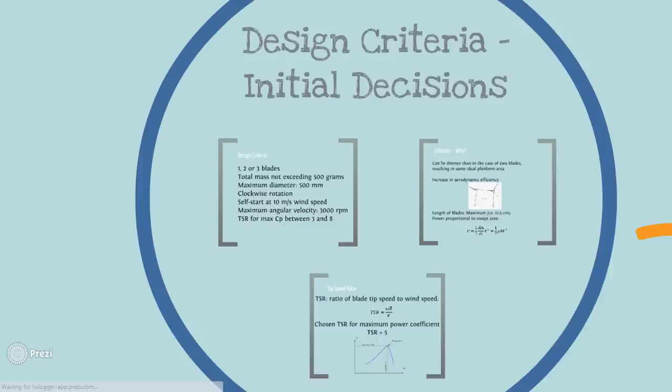The design specifications for this task are as follows: 1 to 3 blades, maximum weight of 500 grams, and a maximum diameter of 500 millimeters. It must self-start at 10 meters per second and must not exceed 3000 revolutions per minute. Finally, it must be designed to have a tip-speed ratio between 3 and 8 at its maximum power output.

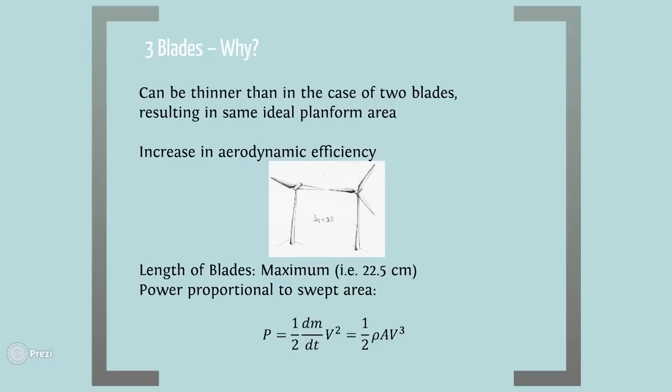Our first design choice was to use a 3-blade turbine to maximize energy extraction from the air. But why do we use 3 blades instead of 2? Wouldn't it save weight and material costs? Well, 3 blades could be designed thinner than 2 blades and hence maintain the ideal planform area while increasing aerodynamic efficiency. PAL also decided to maximize the length of the blades after realizing that the majority of the lift comes from the tip region and that the power was proportional to the swept area.

After settling on 3 blades, the next consideration is to determine the optimum tip-speed ratio. Taking into account the fact that the real TSRs are usually higher than the design ones, we chose a TSR of slightly less than 5, which is a typical value for a maximum CP.

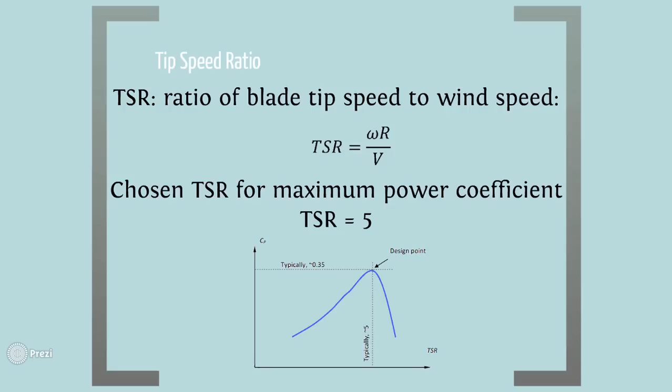Having chosen the key aspects of our design, we can start investigating the aerodynamic characteristics of our turbine. Okay, but start with the basics. How does a turbine actually generate power?

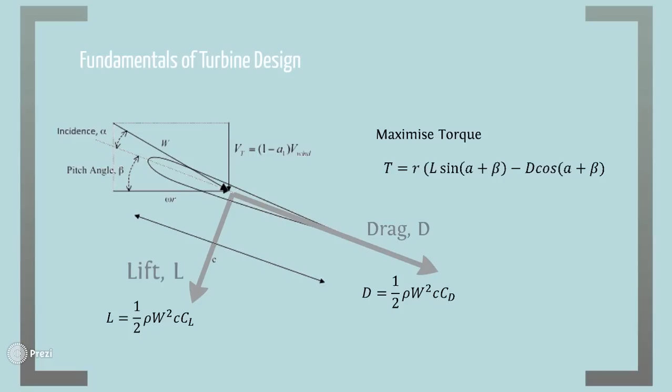Well, there are 2 component forces acting upon the blade at any one time: lift, which generates a moment about the axle, and drag, which opposes motion and reduces the efficiency of the turbine. Ideally, we would maximize the lift-to-drag ratio to optimize the aerodynamic efficiency and the torque produced by the blade. This torque will then drive a power generating device such as a dynamo.

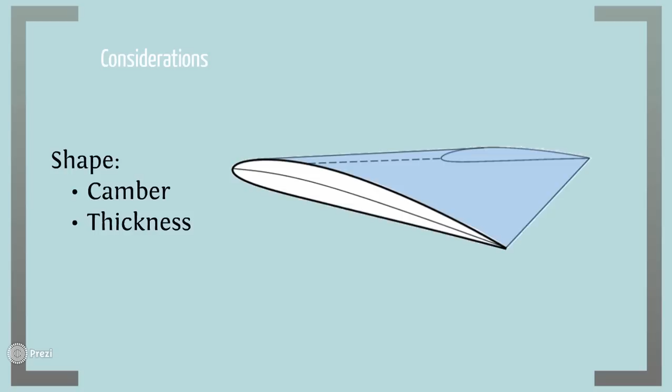There are 3 key design considerations that affect the performance of the individual blades: the shape of the airfoil, such as the camber and thickness, the span-wise pitch variation, and the span-wise chord length variation.

PAL conducted extensive research into different types of airfoils used in wind turbines. According to Dr. Giguère and Dr. Selig, the SG6040 and SG6043 are appropriate for small turbines. Upon further analysis, we found that the SG6040 is exceptionally efficient and sturdy at the root, and the SG6043 is more aerodynamically efficient for the tip.

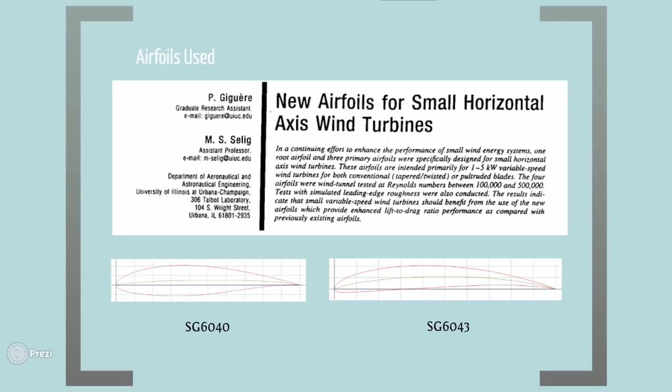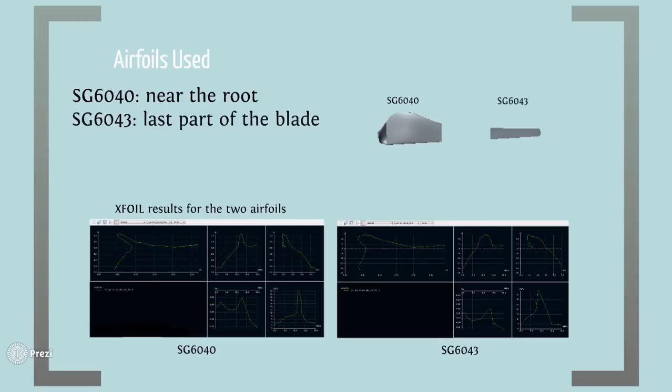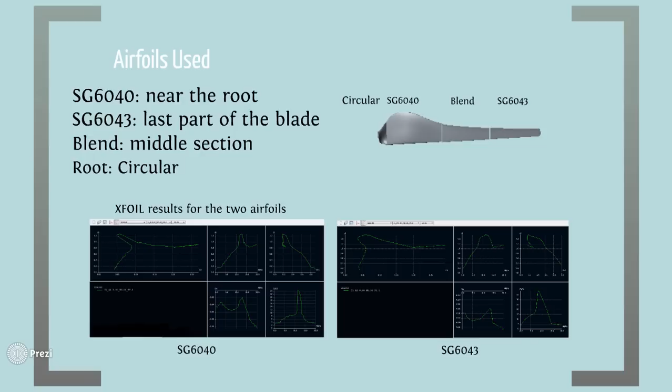We therefore decided that we would experiment with a blend of airfoils along the blade. We used the SG6040 for the portion of the blade closer to the root, and the SG6043 for the portion closer to the tip, with a blended section in between. Because a negligible amount of lift is produced at the root, we decided to use a circular section for structural purposes and to reduce the obstruction to airflow.

Utilizing xfoil and airfoils.com, we checked that the research paper by the University of Illinois at Urbana-Champaign was accurate by testing the aerodynamic performance in the relevant flow regimes. We were also able to find the ideal angle of attack for maximum CL, about 10 degrees, which we then used to calculate the pitch variation of our blades.

There are 2 main equations that can be used to determine this variation: Schmitz and Betz. Both consider the effect of the rotation of the blade on the incident angle of the airflow. However, Schmitz's equation also considers the added effect of the rotation of the wake due to the spinning rotors. Because of its more sophisticated approach, we use Schmitz's equation to define the pitching of the blade along the radius, such that the angle of attack remains at the optimal value with respect to the incident flow velocity.

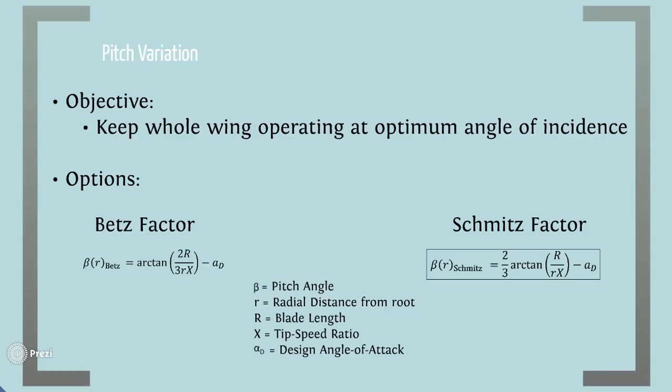Finally, to design an efficient airfoil, we need to optimize the chord length. Our objective in deciding upon the chord length variation of the blade was to maximize the lift-to-drag ratio and maintain a constant circulation along its span. We had 3 different options: the inverse X relationship, the Betz factor, or the Schmitz factor.

Again, only the Schmitz equation considers the rotational flow of the wake, and Dr. Patel, in his book Wind and Solar Power Systems: Design, Analysis and Operation, agreed that Schmitz's was a much more accurate and realistic equation to derive an ideal airfoil. For these reasons, we decided to use the Schmitz equation.

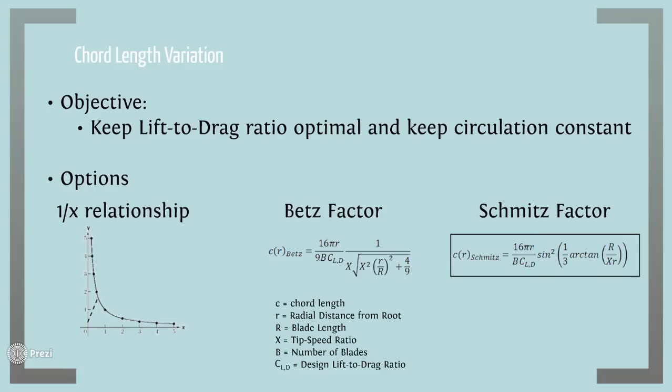Okay, so you've made sure the airfoil is all optimized, but how do you know it won't just break apart? Well, that's the next part of the design process. We have to ensure that what we have come up with so far is within material limits we have to work with. As with most structures, we can break down our internal forces into those acting in plane with the blade and those acting perpendicular to it.

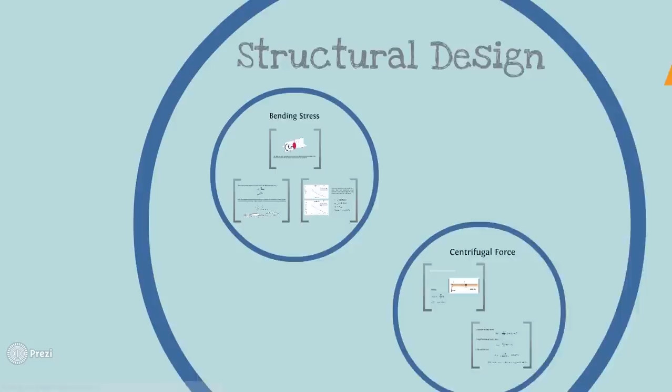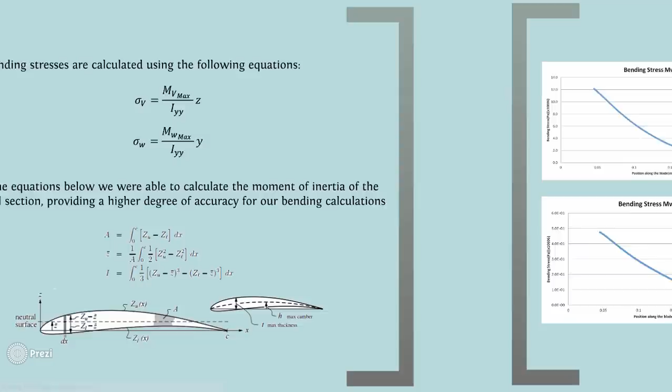First, we looked at the bending stresses that occur due to the force imparted on the blade by the oncoming wind and the inertial forces acting against the rotation. By applying known conditions, such as the free stream air velocity and the predicted angular velocity, we can model the response to such forces using these equations. Luckily, we found that the bending moment experienced by this design is within material limits, with a large safety factor of 44%.

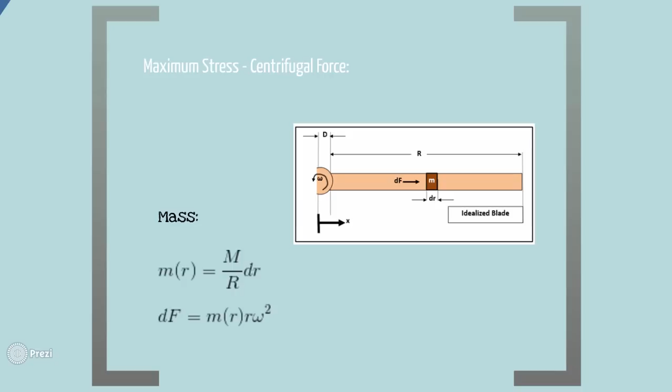The other structural consideration is the centrifugal force that acts on the cross-sectional area of the blade due to the rotational inertia. By integrating the mass of the blade along its span, the tensile forces due to the spinning mass could be calculated.

The rotational inertia is at its maximum at the root, and thus it was important to ensure a suitable cross-sectional area. After including a safety factor, we chose a diameter of 10mm.

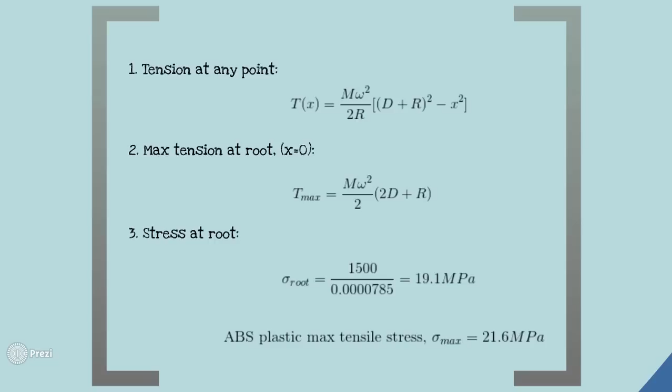Okay Jim, enough about the blade, let me tell you about how we went from concept through prototype. Oh, but I have so many questions. Calm down Jimmy, you can ask them at the end of my pitch.

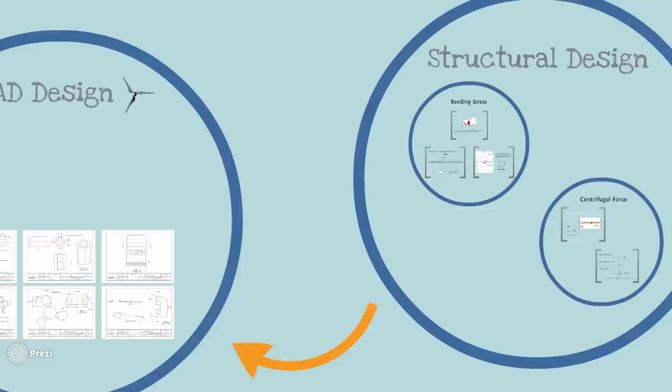Once we had our specifications sorted, we used the computer-aided design program called Creo to realize our design.

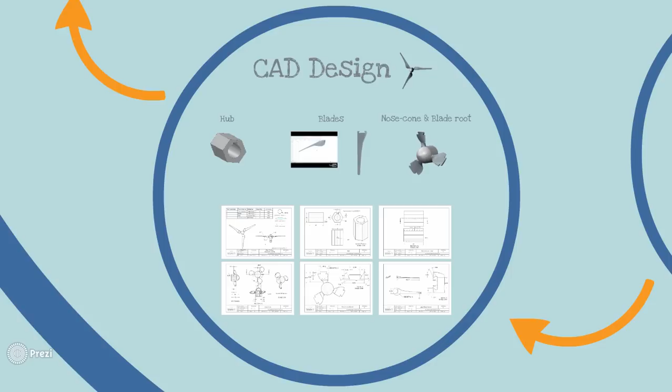Let's have a look at the hub, upon which we will mount the aerodynamic part of the turbine. We designed the hub in a hexagonal shape to improve traction. The blades were created using multiple airfoil sections, which were blended together using the software. Finally, we modeled the nose cone in an ogive shape, much like those seen in typical everyday windmills. This is done in order to minimize the interference effect on the root of the blade and reduce drag.

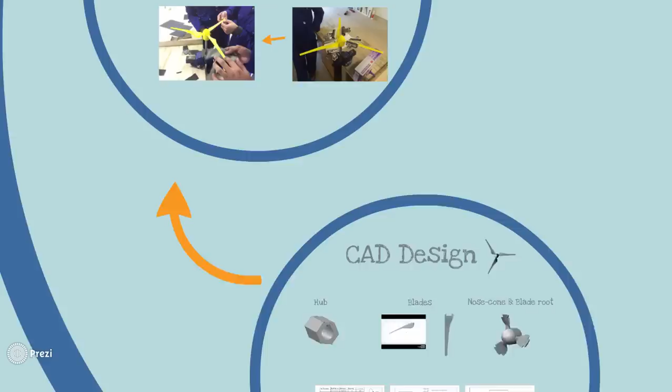The drawings we created in Creo were then used as a reference throughout the manufacturing process. Let's move on to the manufacturing stage. The aluminium hub was milled manually using a variety of precision tools.

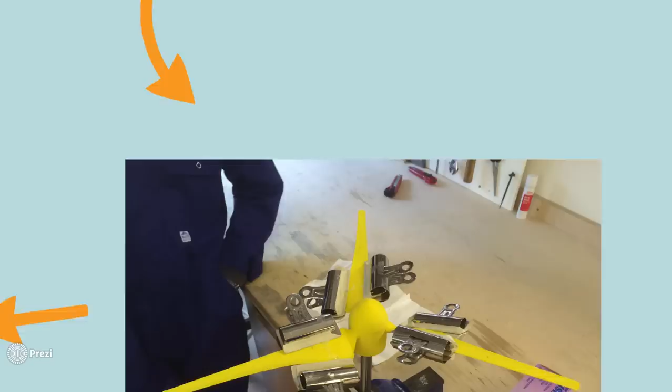We then used the rapid prototyping machine to manufacture our blades and nose cone in multiple parts using our Creo models. The different segments of the blade were glued onto the nose cone and the turbine were sanded. Following this, we applied a layer of lacquer to improve the smoothness and hence aerodynamics of the blade before conducting another round of sanding. Including the hub, the weight of the turbine was found to be about 150 grams.

Wow, it's really starting to take shape. So how did it perform?

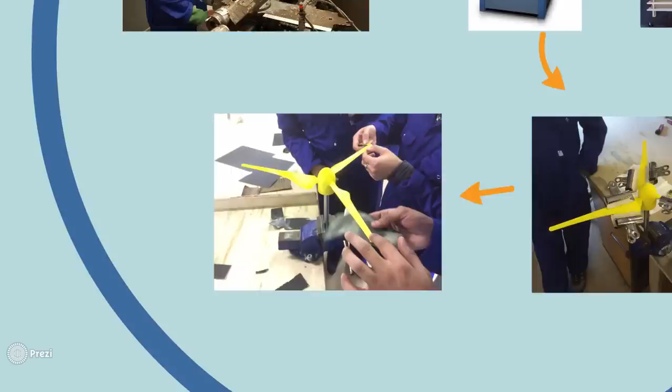Well, taking into consideration that we took a novel approach to designing the blades, we were cautious in our expectations. Unfortunately, the testing of our initial design was not successful, as the wind turbine did not self-start at 10 meters per second or even at higher wind speeds.

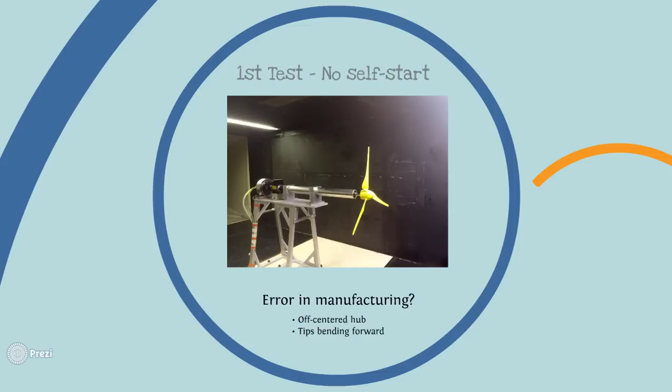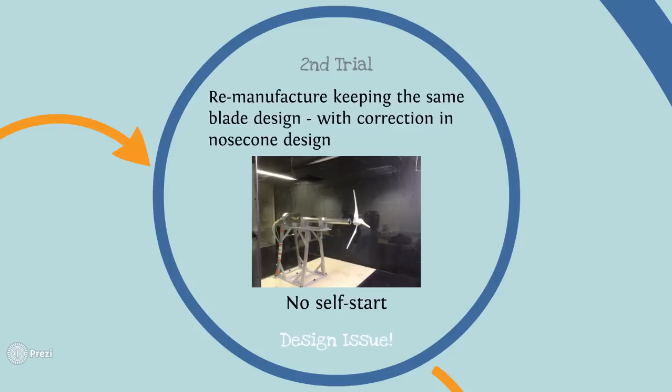So what went wrong? We observed that two of the blades were bending slightly forwards and the pitch of the blades were altered due to the airflow. Furthermore, the hole of the hub was not centered. We decided to reprint the blades to fix these manufacturing defects and rerun the test. However, testing the newly printed wind turbines had the same results as our first test. This clearly indicated that our design was flawed.

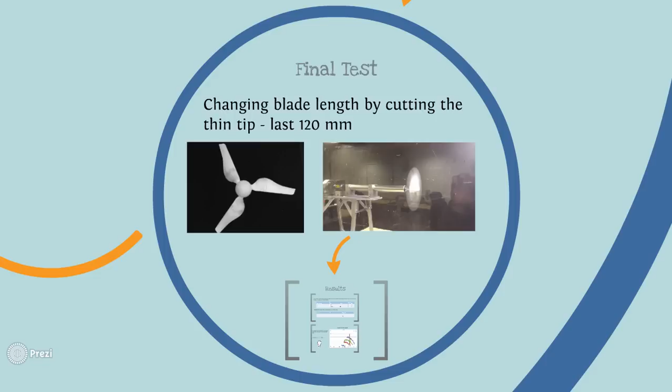We hypothesized that the thin flexible wing tips were the cause for this failure. We decided to cut the blades to almost half the length and hence remove these thin tips. If the turbines were to work effectively now, it would prove our hypothesis. Our test showed that despite it again failing to self-start, it eventually reached a maximum RPM of 2600 after being given a small push. This smaller wind turbine seemed to have a considerably better performance than our first turbine, allowing us to understand the limitations of our design.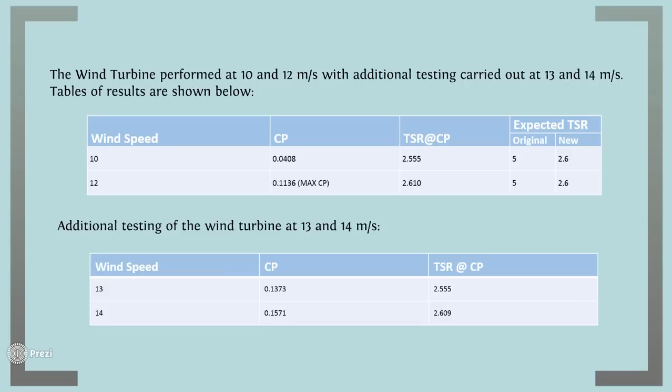The wind turbine was operated at 10 and 12 meters per second. With the changes made to the wind turbine by clipping the blade tips, our expected TSR dropped to 2.6. Our modified wind turbines had a TSR that deviated by less than 2% from the expected values at all wind speeds. The strong correlation between expected and experimental TSRs suggests that the wind profile was accurate and that the performance results could be predicted using our design parameters.

The turbine produced a maximum output of 0.114 at a wind speed of 12 meters per second. The power generated by this wind turbine is enough to light up a bulb.

Wow, that's moderately impressive. But what were the flaws? What can you guys do to come up with a better turbine and save the world?

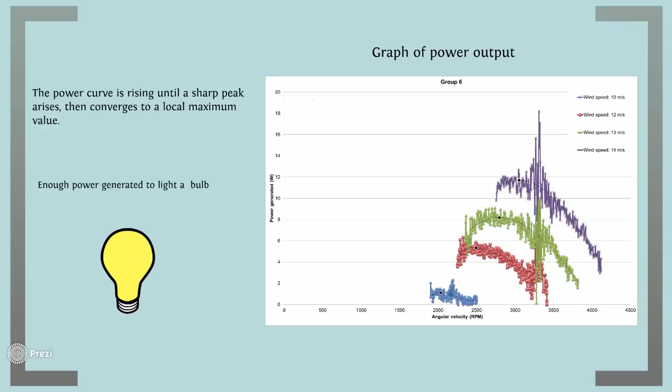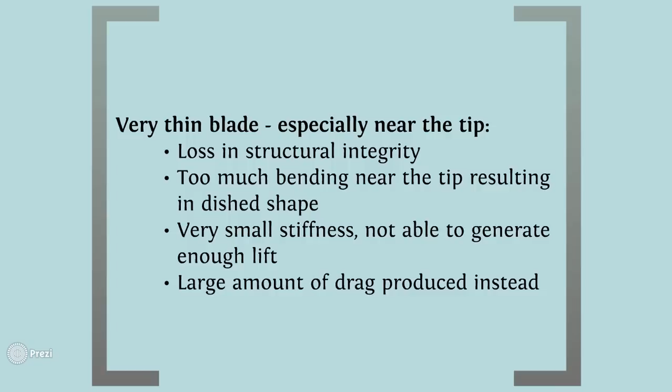The final test proved the hypothesis that the main issue was that our blades were too thin, especially near the tips. This resulted in a lack of stiffness, causing the tips to bend backwards and adopt a dish shape. Hence, instead of generating the majority of the lift, large amounts of drag were produced. When predicting the structural behavior of the blades, we only considered the failure modes that would arise due to bending moment, without investigating the flexural stiffness and the effects of bending on the aerodynamics of our design.

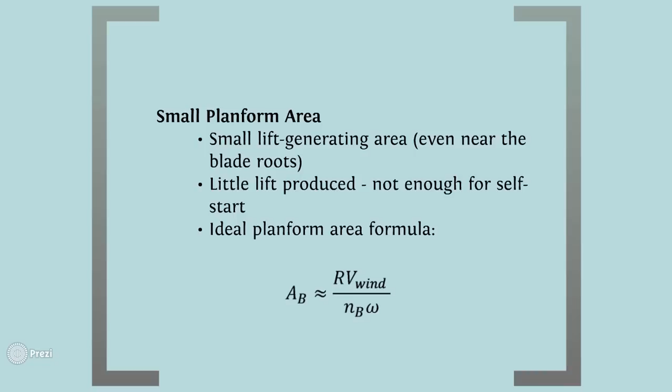In the same vein, the total planform area for our wind turbine was not as large as required for optimal generation of lift. We realized that the formula for the ideal planform area was something that we had failed to include in our design considerations.

Finally, many of the shortcomings of the turbine were due to the choice to design the blade to operate optimally while already rotating at its maximum TSR in 10 meters per second winds. This meant that we did not consider the self-start requirements sufficiently. To prevent this, more analysis could have been done in suboptimal operation conditions, particularly from when the blades were at rest and accelerating to the maximum TSR.

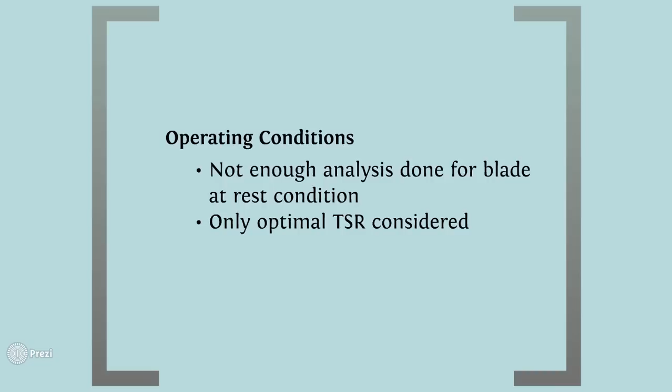So what are you guys going to do about it? Are you just going to scrap the entire project?

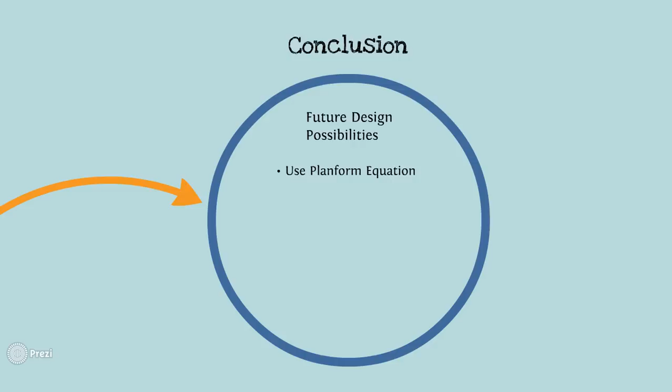Not at all, Jim. Testing and redesign is an integral part of the evolution of a product, and we would definitely look at improving our design in the following ways. We would incorporate the planform area equation and have a thicker aerofoil closer to the tips. Also, we would consider reducing the size of the nose cone and hence increase the length of the blade to better improve the performance factor.

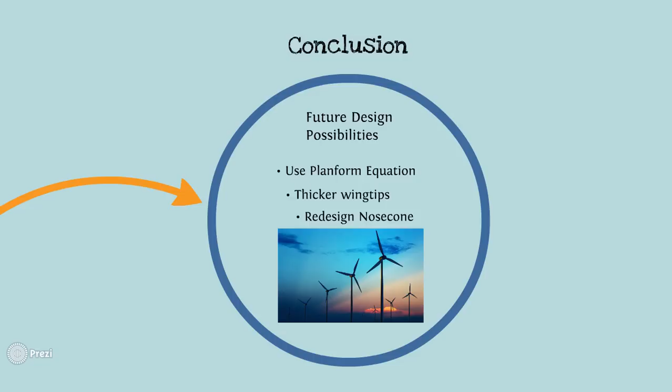With dwindling natural resources and a rise in demand for clean electricity, it has never been more necessary to create an efficient, sustainable source of power. Hence, PAL will continue pumping its resources into the research and development of a more efficient wind turbine using hybrid blades.